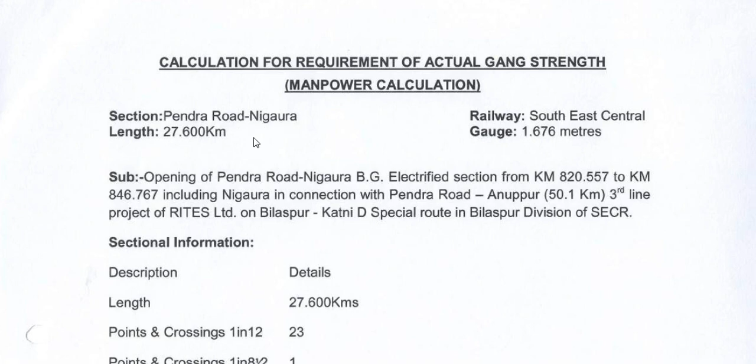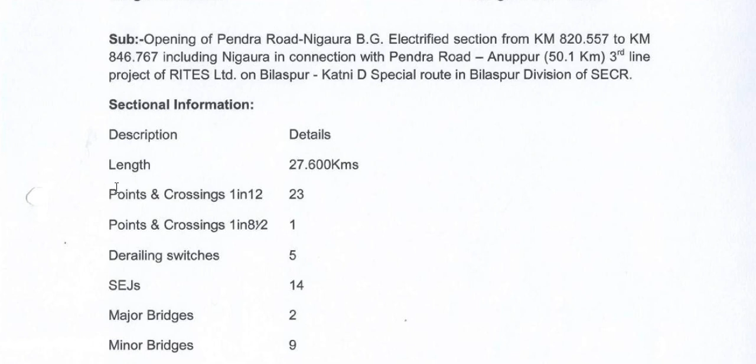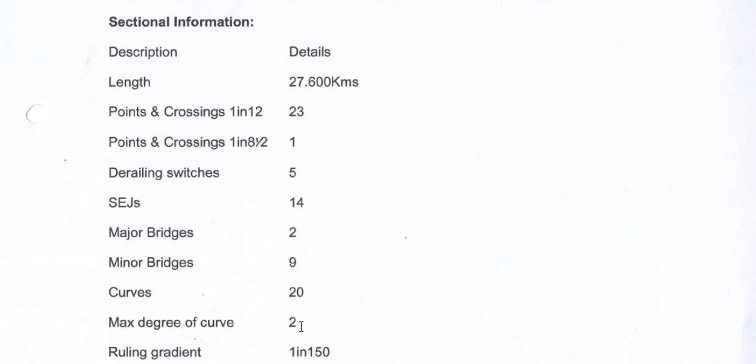First, sectional inputs: length of track 27.6 km, points and crossings 1 in 12: 23, 1 in 8½: 1, derailing switches 5, SEJ 14, major bridges 2, minor bridges 9, curves 20, maximum degree of curvature 2 degrees, ruling gradient 1 in 150, LC gates 4, high bank 11.7 meter, deep cutting 3.47 meter, traffic density 40 GMT per annum, average rainfall 200 mm, maximum rail temperature 55 degrees centigrade, minimum rail temperature 2 degrees centigrade. These are the sectional information.

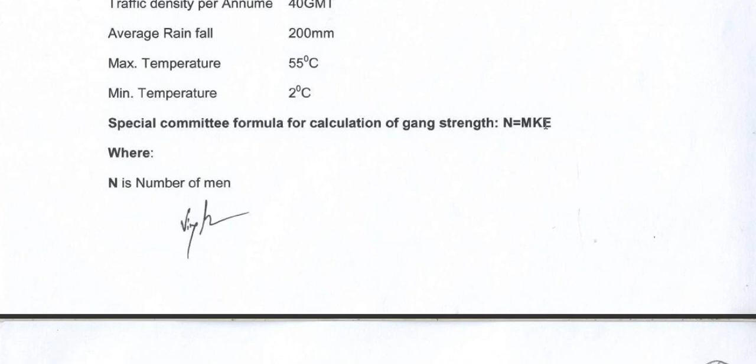We are going to apply the same sectional information into the special committee formula for calculation of gang strength, N = M × K × E. What is N, M, K, E? M is the manpower factor, the weightage for the actual man days required to carry out normal permanent way maintenance work in a year versus the actual man days available, with 10 to 20 persons and a jurisdiction of 4 to 6 kilometers. For this average, I considered M = 3.

K is the correction factor. Due to modernization of track, the effort required to maintain short welded rails and long welded rails is much less compared to fish plated track, which varies from 0.1 to 1.0. Since all are LWR, almost all CWR track except yard points and crossings, I considered 0.1, the minimum.

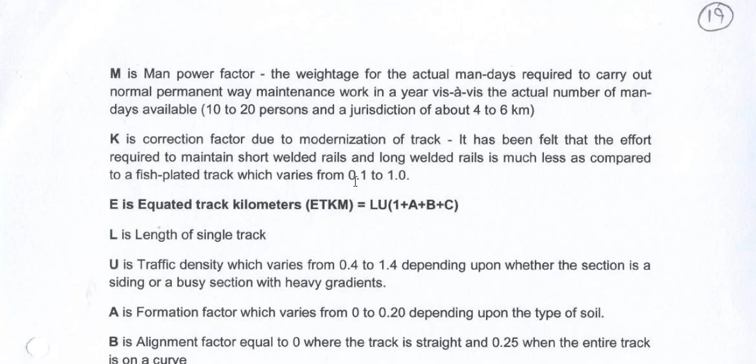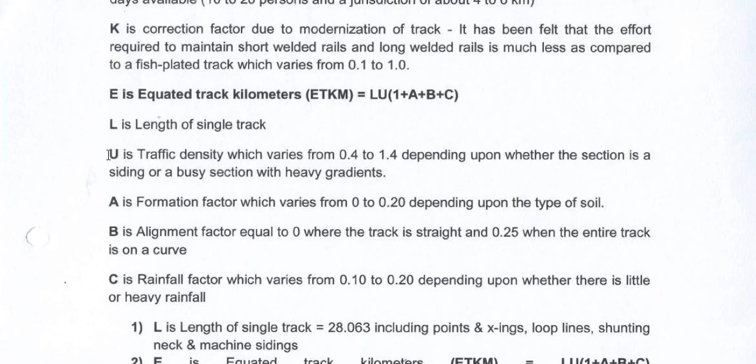Then E is equated track kilometers, ETKM. E = L × U × (1 + A + B + C). L is the length of single track. U is traffic density, which varies from 0.4 to 1.4 depending on whether the section is a siding or a busy section with heavy gradients. U is considered 1 because traffic density here is 40 GMT per annum. A is the formation factor, varying from 0 to 0.20 depending on soils: black cotton soil, sandy soil and moorum soil. All are mixed in this section, so it was considered 0.1.

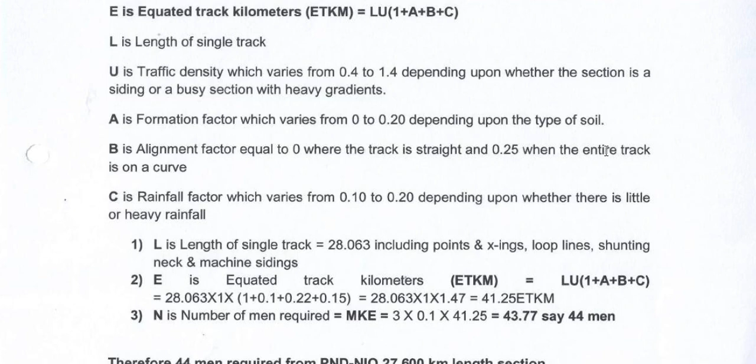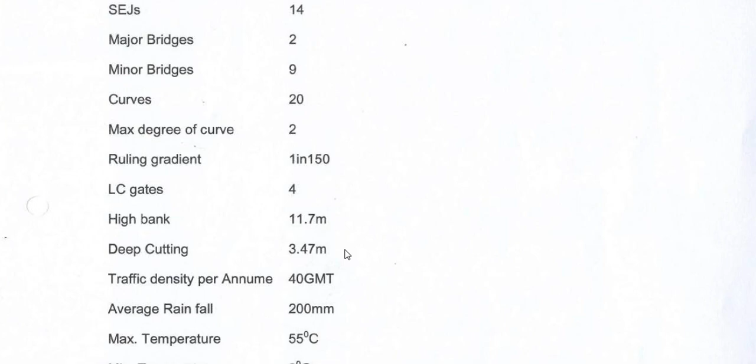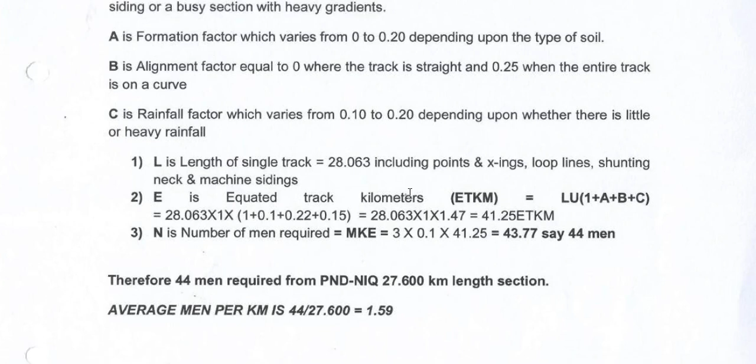Then B is the alignment factor, 0 for straight track and 0.25 if the entire track is on curves. Here there are 20 curves and maximum degree of curve is 2 degrees, so B is considered 0.22. Then C is the rainfall factor, varying from 0.10 to 0.20. Since rainfall in this section is 200 mm per annum, C is considered 0.15.

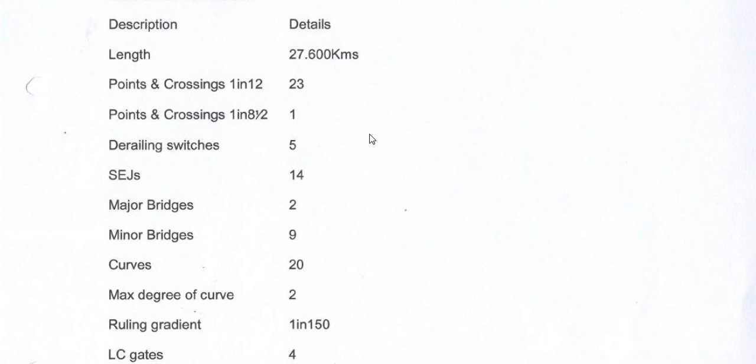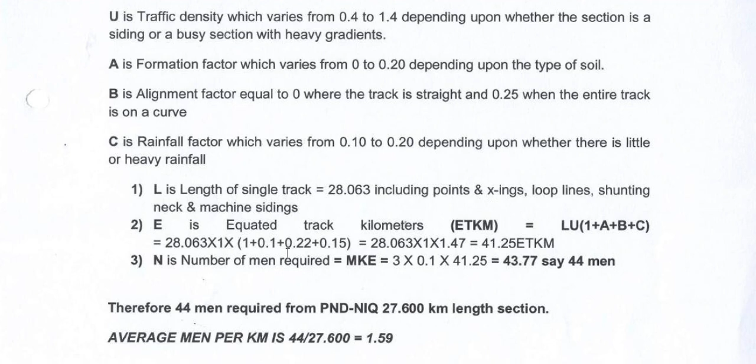L means length of single track. Length of single track here is 28.063, whereas in sectional information length is 27.60. How is it more? L is the length of single track including points and crossings, loop lines, shunting neck, machine siding, etc. For calculation of ETKM, L × U × (1 + A + B + C) = 28.063 × 1 × (1 + 0.1 + 0.22 + 0.15).

The entire thing gives 41.25 ETKM. Then number of men required N = M × K × E, manpower factor, correction factor for modernization of track, and ETKM, that is 3 × 0.1 × 41.25, giving 43.77, say 44 men. So 44 men are required for Pandra–Nigora, 27.6 kilometer length, an average of 1.59 men per kilometer.

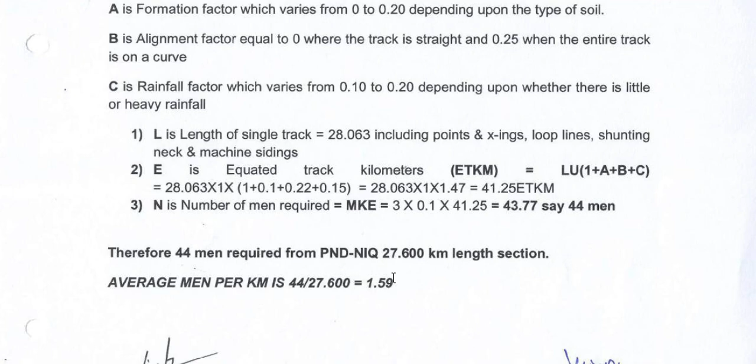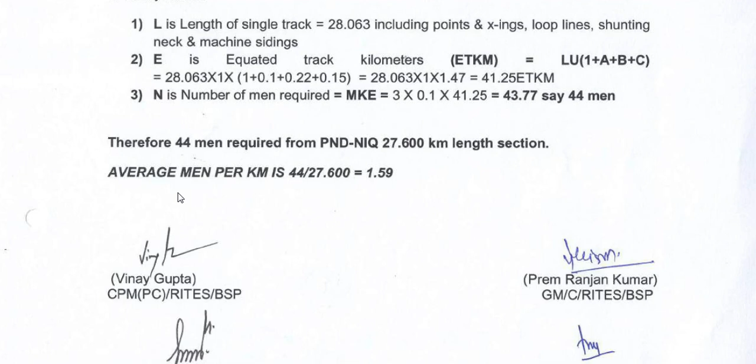Whereas the new formula, the Manpower and Cost Norms for Track Maintenance, MCN-TM committee, in 2010 considered the activities of track maintenance and categorized them into primary maintenance and auxiliary maintenance. This is already included in IRPWM para 659 also. As per this formula, leave reserve is also given. Here it is calculated only 44 men.